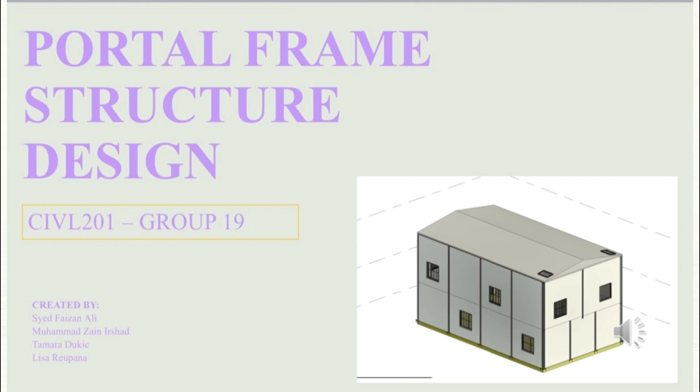In today's era of industrial and commercial revolution, the demand for various size structures like warehouses has surged, and these are commonly designed using portal frames. The team at Visionary Designs has produced a preliminary portal frame structure to the specifications provided by the client, whilst complying with the relevant Australian standards and codes for steel structures.

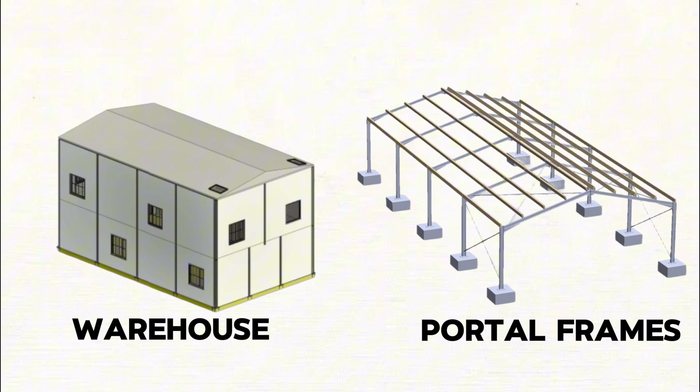We are provided with a sketch of the portal frame structure as a guide for how the warehouse should look and a list of parameters, such as a 20-meter long building with a frame span of 10 meters, built on a 400 millimeter thick slab structure, at least 10 windows spaced throughout, 2 doors at the front, and a mezzanine floor 4 meters off the ground, at least 32 square meters in size, as well as an eave height of 10 meters and a roof pitch of 6 degrees.

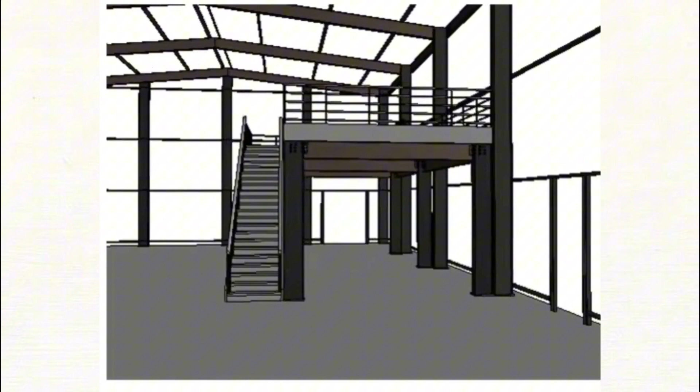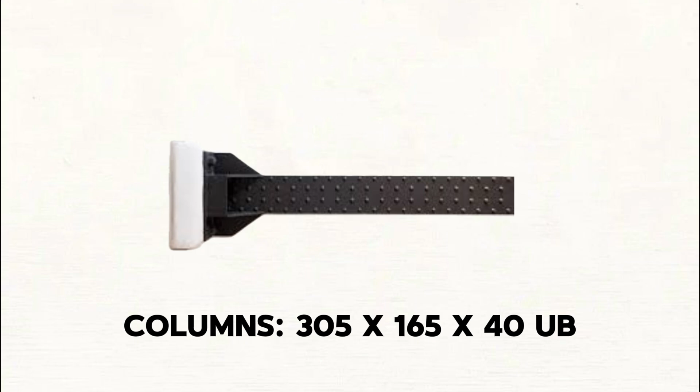So this project was completed using Revit by Autodesk. Preliminary structure design was produced according to the specifications provided by the client and complying with the relevant Australian standards and codes for steel structures. First of all, we have columns. Columns used in the portal frame structure were made of steel 45 to 345 and selected for their strength and durability. These were placed at 400 mm and 7000 mm on the base and top level respectively.

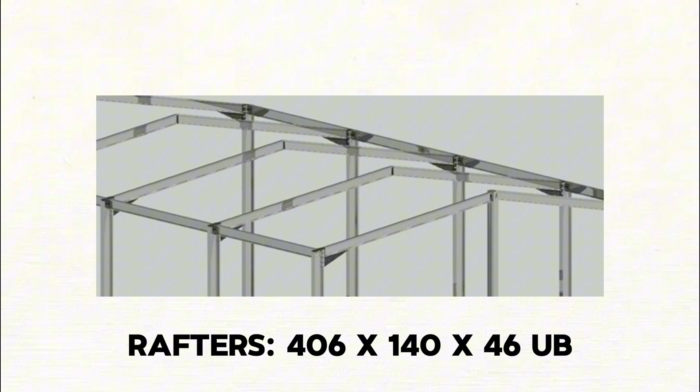Next, we have rafters. Rafters used in the structure are universal beam 406 x 140 x 46 UB made of steel 45 to 345. They are spaced at 5000 mm from each other and the span is 8820 mm. Next we have girts. The girts used in the structure are light gauge lip channel girts C100-12 selected for their strength and durability. These were overhanging at a level of 200 mm and are spaced at 200 mm.

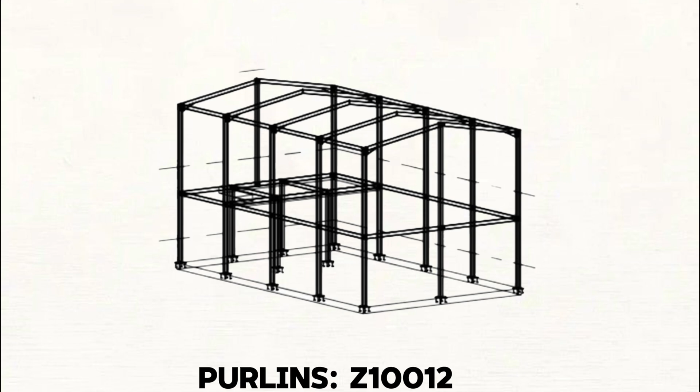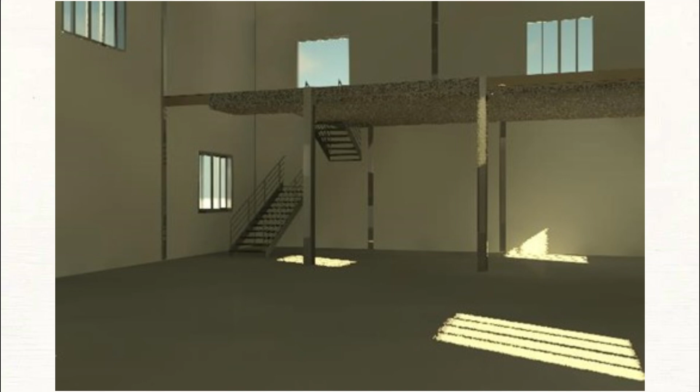Next we have purlins. Purlins used in the portal frame are light gauge Z purlins Z100-12 which are 9000 mm long. Fascia purlins come in various designs which enhances their usability for a wide range of purposes. These are overhanging at 200 mm, spaced at 2000 mm and spanned at 215 mm.

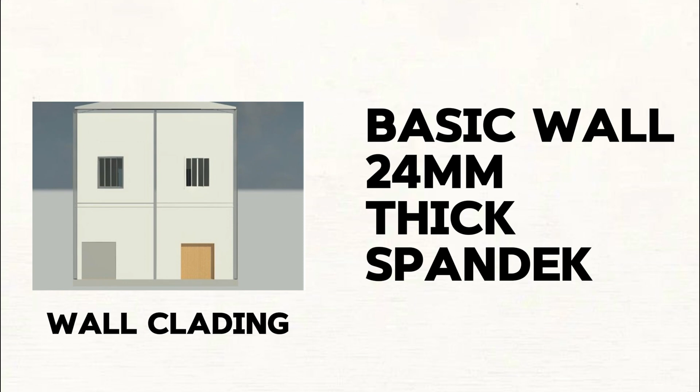Then we have wall cladding. Wall cladding used in the portal frame structure is basic wall 24 mm thick Spandek. Length of each wall along left to right and front to back is 40,304.4 meters and 18,709 meters respectively. The end and intermediate spanning between them are 2070 mm and 2060 mm respectively, overhanging at 200 mm.

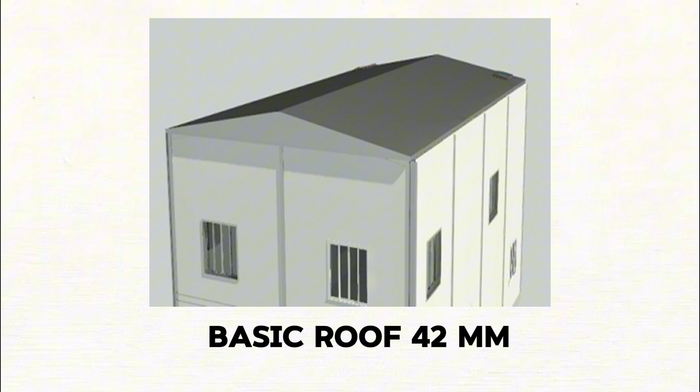Then we have our roof. Roof is on level 3 of the portal frame and it is basic roof 42 mm. Its total area is 805.827 square meters, which is sloped at 6 degrees from the wall, making it almost flat yet inclined enough to keep rainwater and snow off the top surface. Its end spanning is 2070 mm, whereas intermediate spanning is 2020 mm.

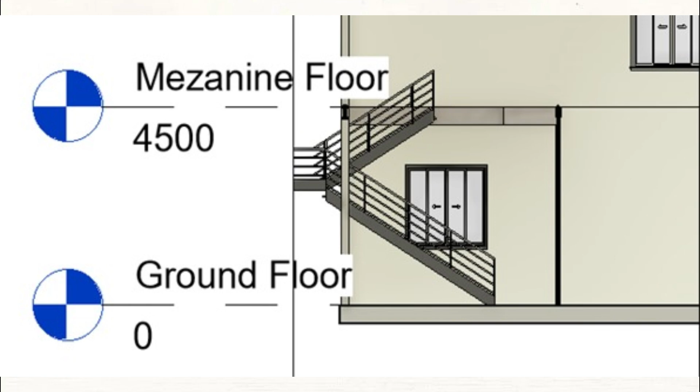Then we have our doors. Two types of doors were used in the portal frame for different purposes. The first one is an overhead rolling door at a height of 2214 mm, while the other door is a single flush door at a height of 2134 mm. Then we have our stairs. There is only one flight of stairs in this portal frame, which has 20 steps. Depth of each step is 20 mm. Base and top offsets are kept at 0 mm at both levels.

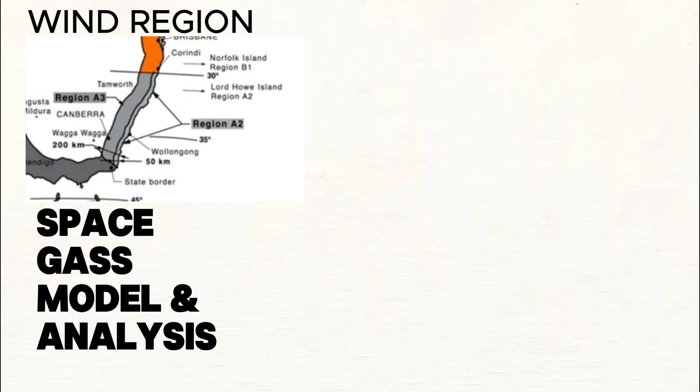In summary, Team Visionary Designs has created a structure design of the portal frame structure via Revit and Space Gass tailored to the client's wishes. The 20 x 10 meter portal frame structure with a 10 meter high eave offers 765.385 square meters of space supported by 24 columns and 30 beams. This design integrates functionality and aesthetics with 10 well-placed windows, 2 entrances and 3 levels.

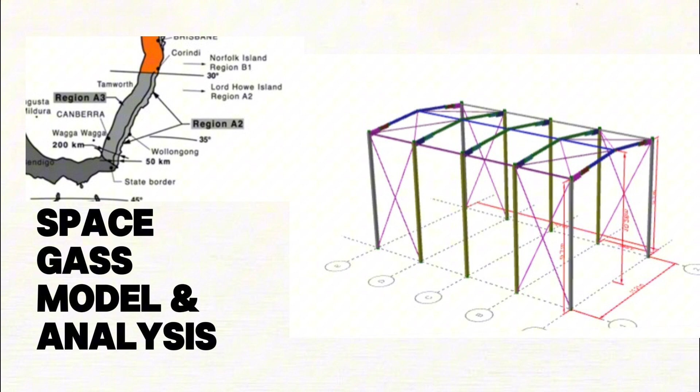Level 1 has a robust 400 mm floor, while Level 2, covering 62.679 square meters, is accessed via 20 steps and boasts a 6 degree inclined roof for water runoff and a sleek look. The project covered primary load cases, analyzed structure behavior with detailed diagrams, and specified member and connection designs to ensure safety and performance by designing the 2D and 3D portal frames in Space Gass.

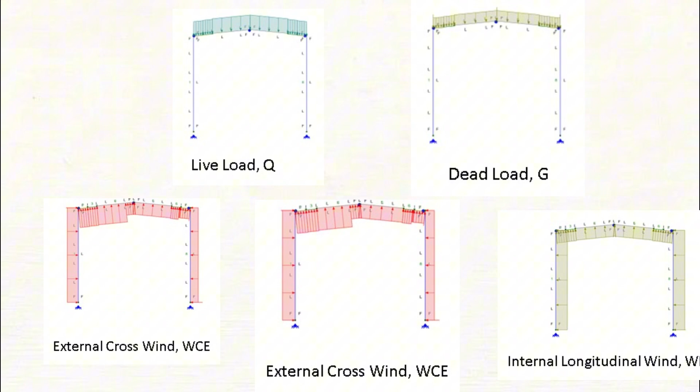We also explored the potential consequences of changing support conditions from pinned to fully fixed, underlining how this modification can impact load distribution and structure response. At last, this presentation represents the commitment to precision and thoroughness in structure design, ensuring that the portal frame meets both aesthetic and safety standards for real-world applications.